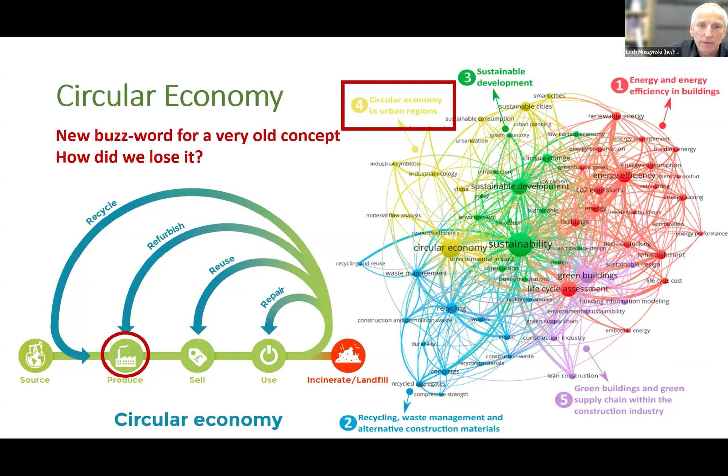We cannot reverse this, okay? But I think understanding the factors moving us away from circularity at the dawn of the industrial era should be very helpful in understanding the factors that we are now struggling against.

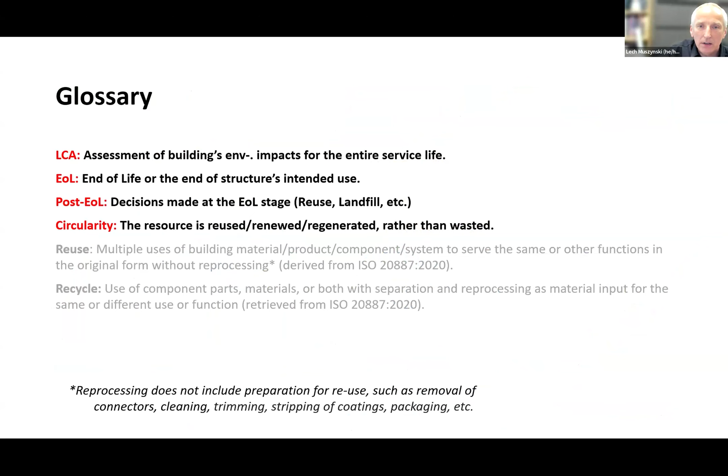The glossary of terms that I planned for here was nicely covered by Milad. I'm going to return to reuse and recycle somewhat later in the talk, so I'm leaving this for later.

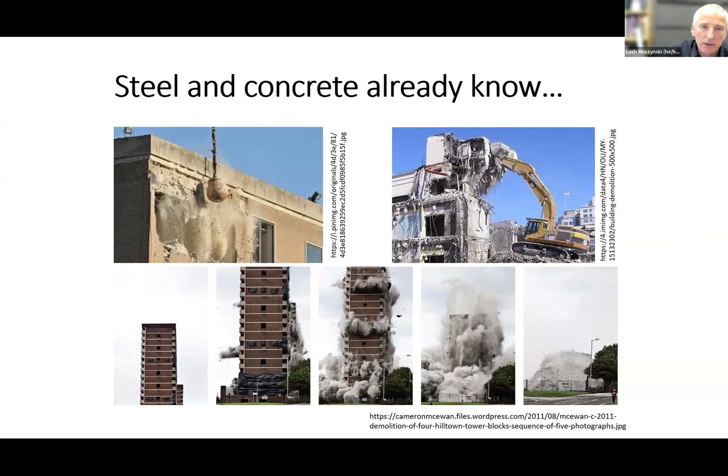Again, as we've heard, even if the world currently may not seem perfect to us, steel, concrete, and other traditional construction industries already know how to take buildings apart, and to a certain degree, even in sophisticated ways, like you see here with the deconstruction of a large building. But they also know what to do with the recovered stuff, or what actually happens with it.

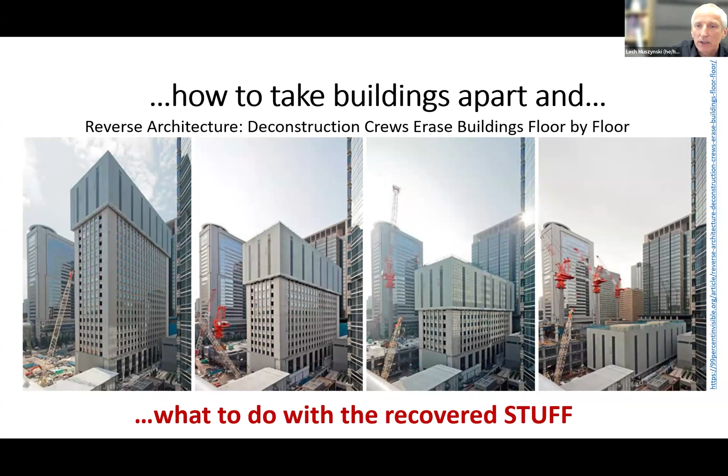Again, we may not be happy, it's not essentially a perfect process. But if we hear the best case presented by Milad in Europe, it's like 35% goes to landfill. It's still an awful number, but it means about 65% of the stuff coming out of demolition or construction is finding some kind of second use, right? So that may not be as bad as we think, and it's important not to underestimate the opponent, so to speak.

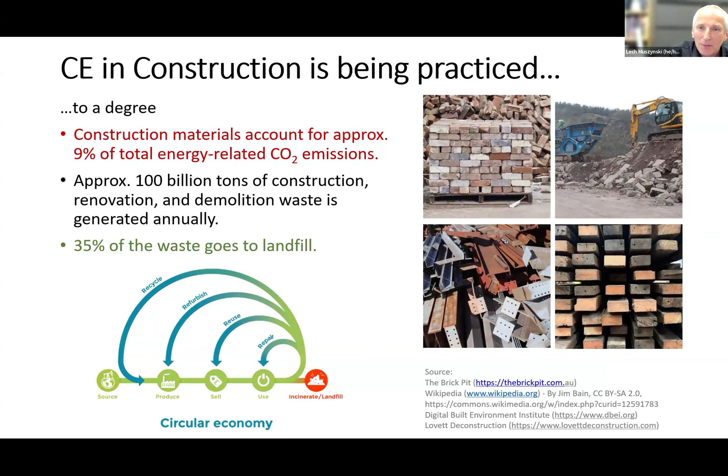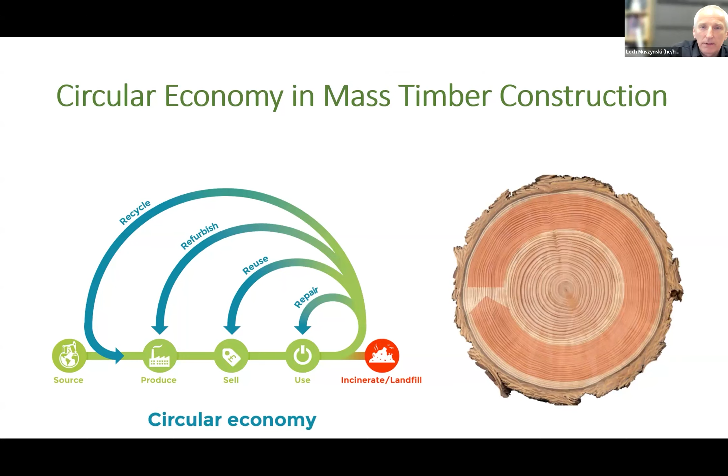Now, it goes without saying, and this going-without-saying is actually the dangerous thing here, that wood should be like the natural hero in this scenario, right? Circular economy: recycle, refurbish, reuse, repair, and at the end of this, perhaps incineration for energy.

And these mass timber buildings can be large, particularly when we're talking about panelized mass timber buildings, which is the focus of my presentation. This is one of the largest, at least for some time—nearly 4,000 cubic meters of wood in here, all prefabricated. Every little piece is made specifically for this project.

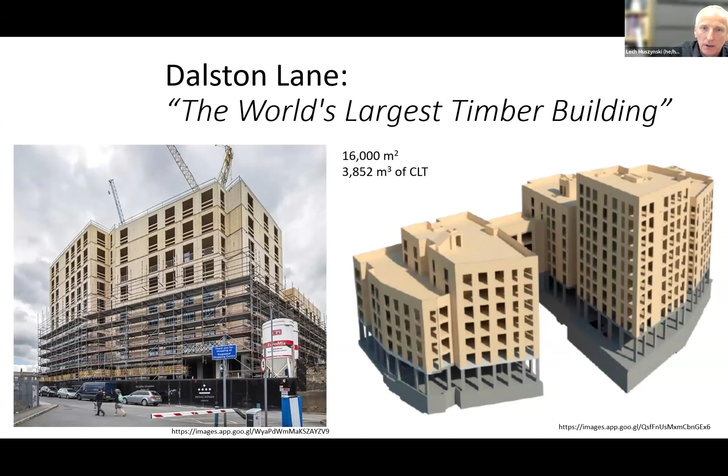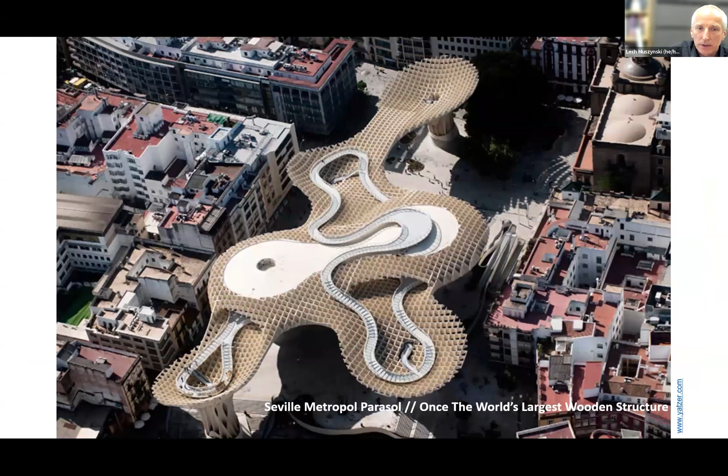And it's like a common theme: the projects must be designed before any panel is pressed or fabricated for the end use. They vary in scale, each seems to be somewhat different.

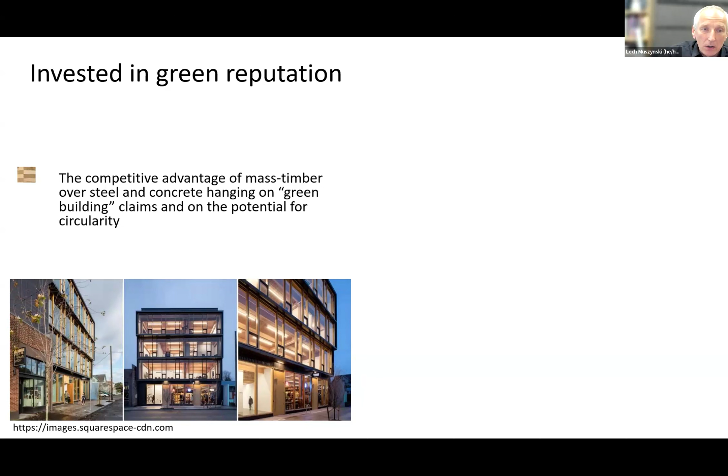Now, another important part to understand is that the competitive advantage of mass timber over steel and concrete hangs on the notion that the buildings are green and have great potential for circularity. This at times justifies going with a somewhat higher cost of building materials or construction, or just matching, not necessarily being less expensive.

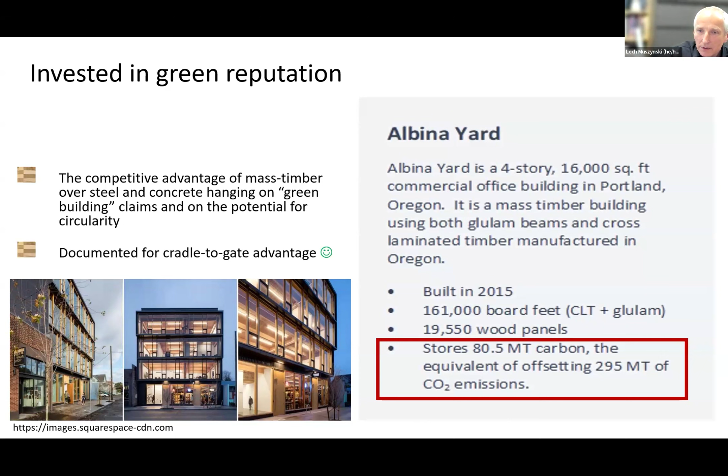Here's an example: Albina Yard, one of the first mass timber panelized buildings on the West Coast, bragging about CO2 emission benefits, with a well-documented cradle-to-gate advantage.

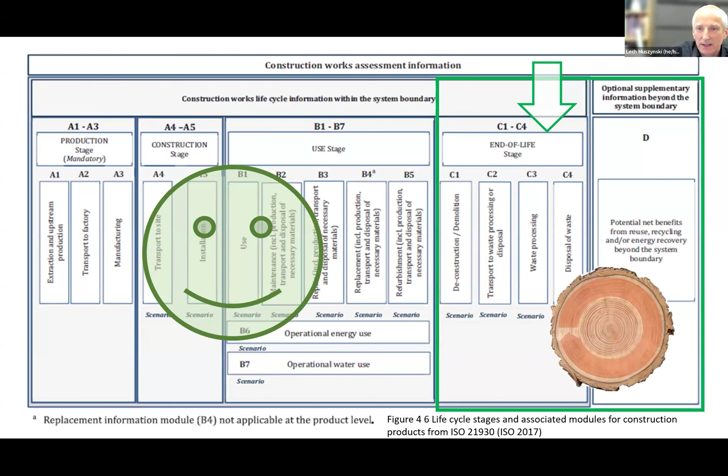Now, cradle to gate, again going back to Milad, this is this part, right? Now, end of use is somewhat more sketchy area, but we are confident—yes, wood can do that, right? Wood is circular, it comes from round logs.

So here's the moment where we need to think: okay, if we want to make good use of what comes out of a building being taken apart, we need to consider two options: reuse. And here is the tricky thing.

Quite often in our discussions, we forget to define terms before we start, and then it leads to all kinds of misunderstandings. Reuse, by ISO definition, is using building components or systems in functions that are as original or close to original, without reprocessing—where reprocessing may not include preparation for reuse, such as removal of connectors, cleaning, trimming, things that Erin was talking about.

Recycle, on the other hand, would be comminuting the original elements and using them in some other way than they were originally used.

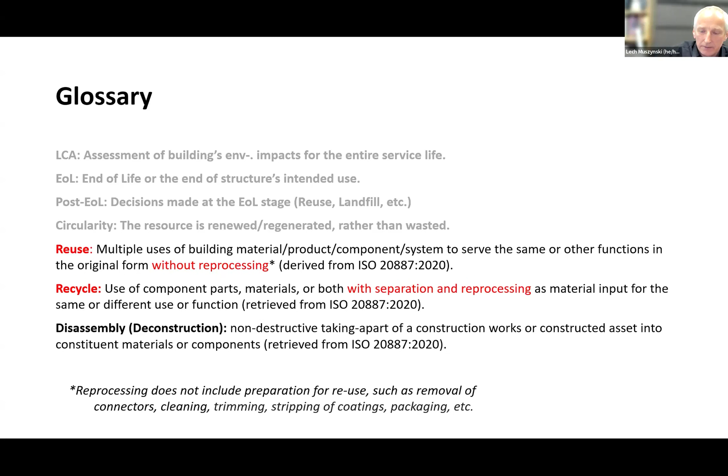Disassembly or deconstruction should be part of this. Now, quite often models that are trying to project into mass timber panels are drawing on the already proven and practiced demolition or deconstruction for light frame buildings, but this is a false similarity.

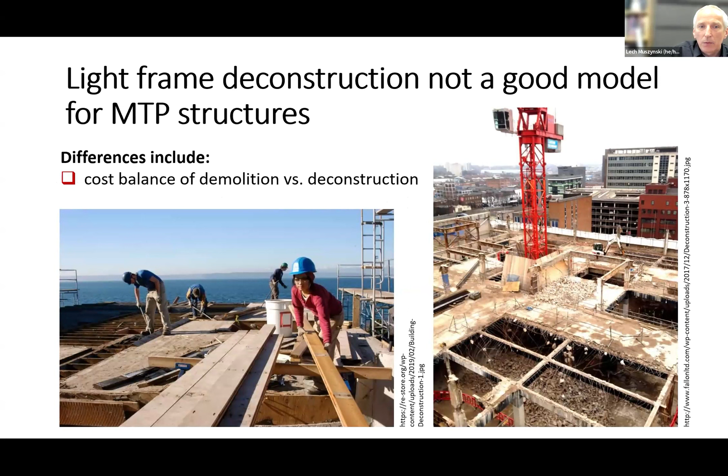There are very different cost balances for demolition versus deconstruction in light frame buildings. First, demolition is even possible, right? The other is that deconstruction can be done board by board, panel by panel, using lots of human labor. This is hardly a good proposition for large panels like this one that can weigh up to 5 tons, and they are made still in very big and heavy elements.

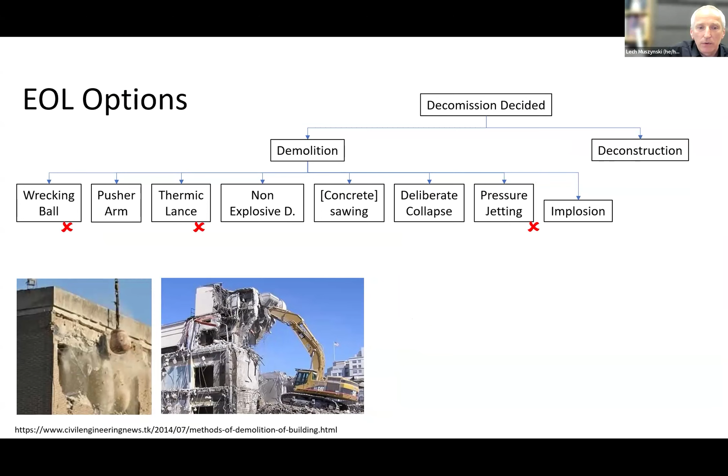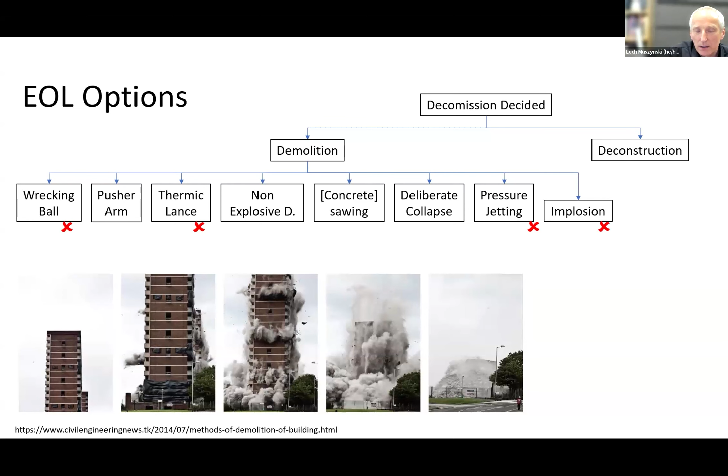So if we consider demolition options, this would be the standard suite of demolition options. We already see that some of them are just unthinkable for mass timber panel construction. These structures have very good performance at shaking tables, so they're not easily crumbled, not easily ball demolished. They cannot implode. There are certain ways that are just unthinkable for the demolition of large panels.

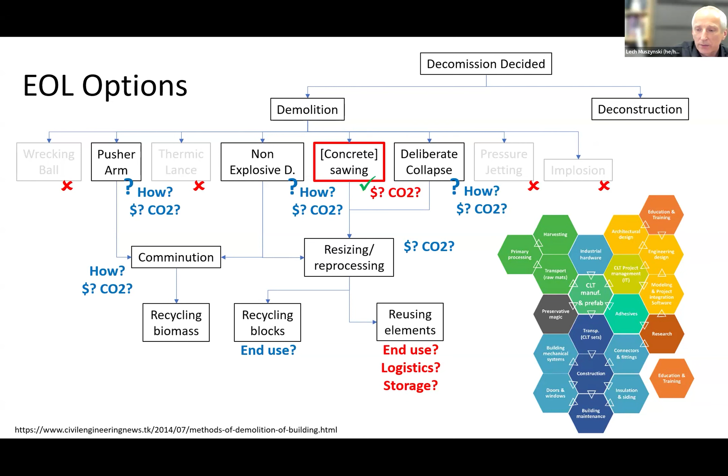Now, even if there are some that assume that parts can be just cut out during the demolition process, they end up with resized elements that are very difficult to reinsert in the process of building or construction that assumes customized fabrication of elements for the end project.

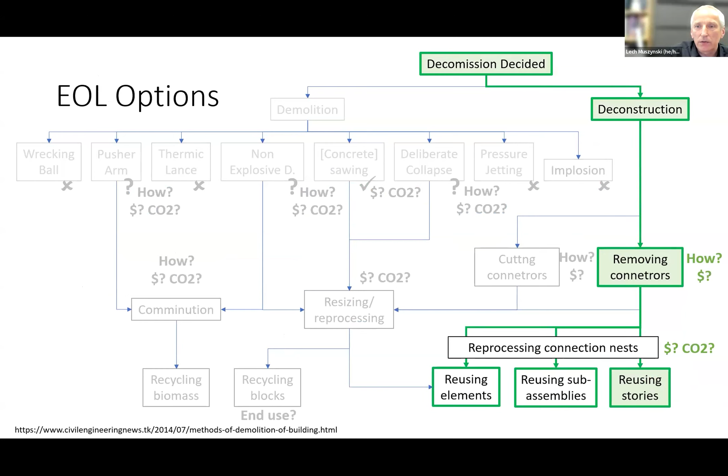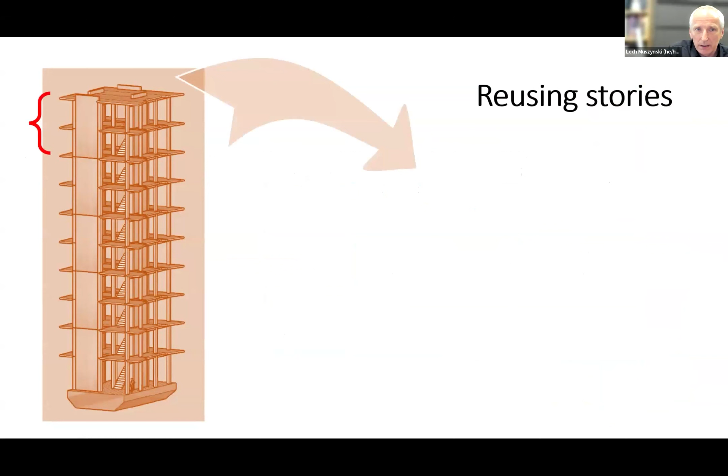So the logical path should be the deconstruction approach, where you are just removing or cutting through connections and reusing either elements, sub-assemblies, or stories. When I'm thinking about reusing stories, it would be if you have a 10-story building and you take it apart, you may reuse the same elements in the same configuration. This would not require any refabrication in a series of smaller buildings.

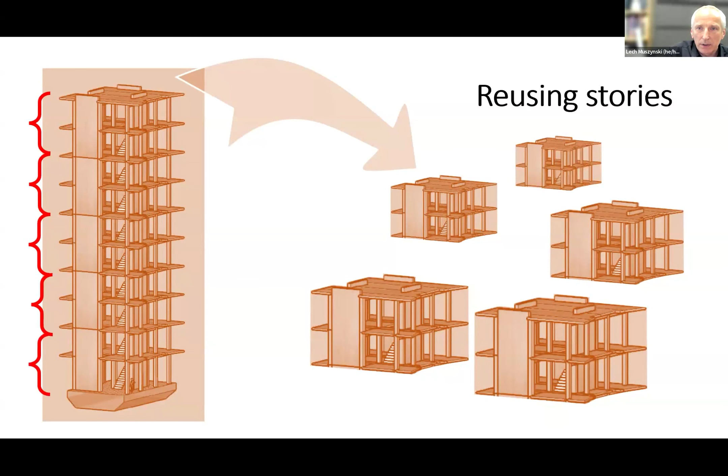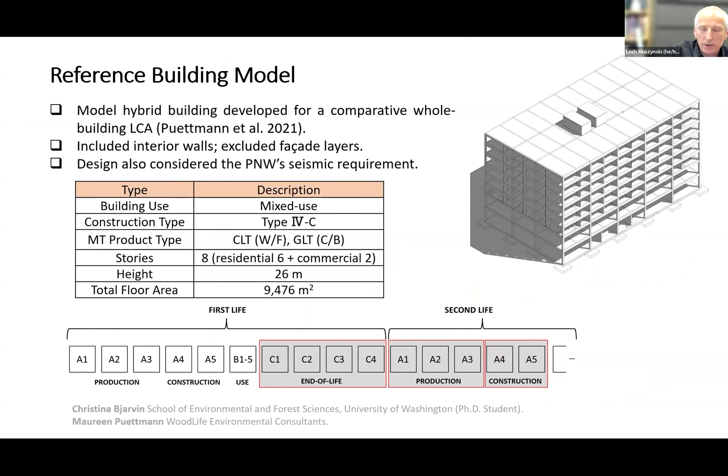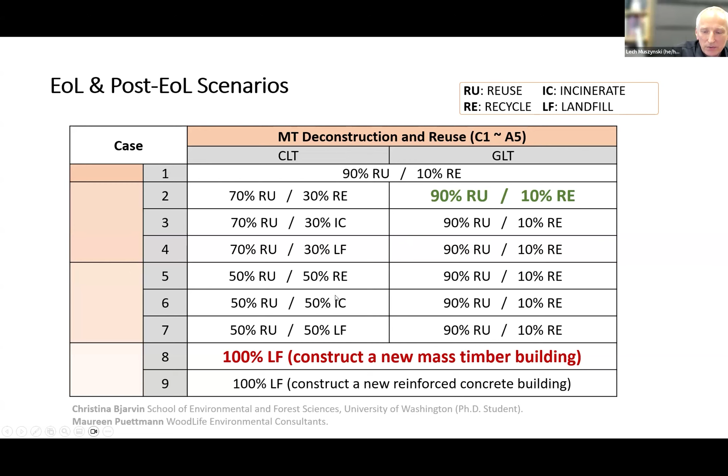And we checked just that. This is a little LCA exercise that has been done by Christina and Maureen on a building with certain assumptions, focusing mostly on the first life and the end of the first life and the beginning of the second life of a building. Nine different scenarios have been tried for CLT and glulam, and we've just selected two extremes for this presentation, just to see how it works.

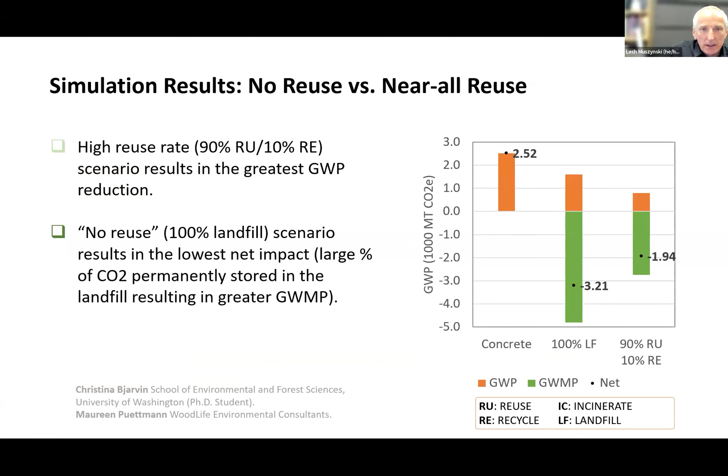And why the high reuse rate, like 90% elements reused and the building rebuilt, essentially the same building on the same place - so there's no transportation or logistics involved here - loses, hands down, with landfilling the entire thing.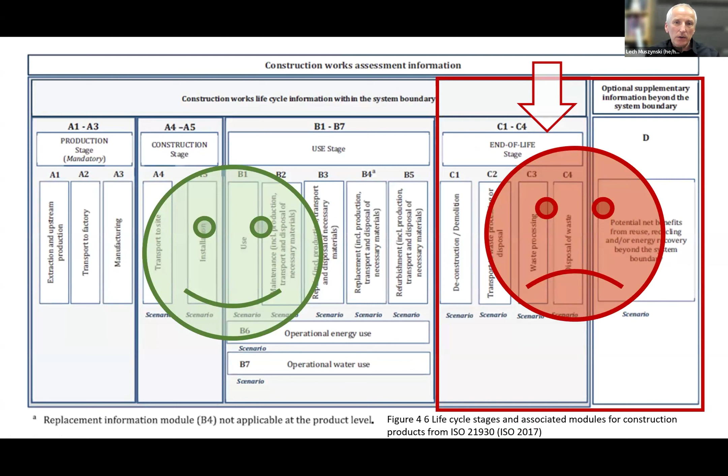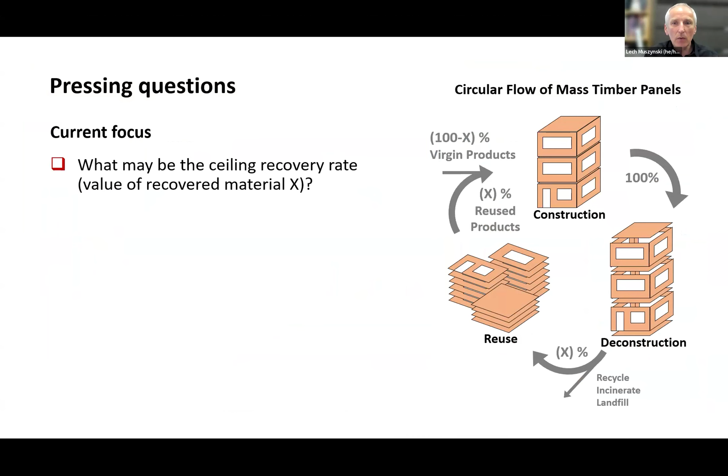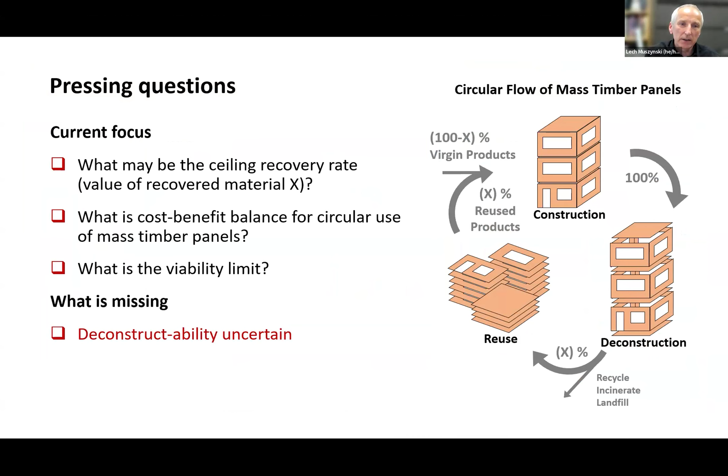And that's troubling, right? I mean, we feel in our hearts and minds that this cannot be true, but we cannot dismiss it without evidence, and the evidence is actually hard to come by. This is because even as our current focus is on how much can be recovered, what is the value of the recovery, what is the cost-benefit balance of this, we are still missing information on deconstructibility of this large panelized building and any empirical data to verify viability of circular scenarios.

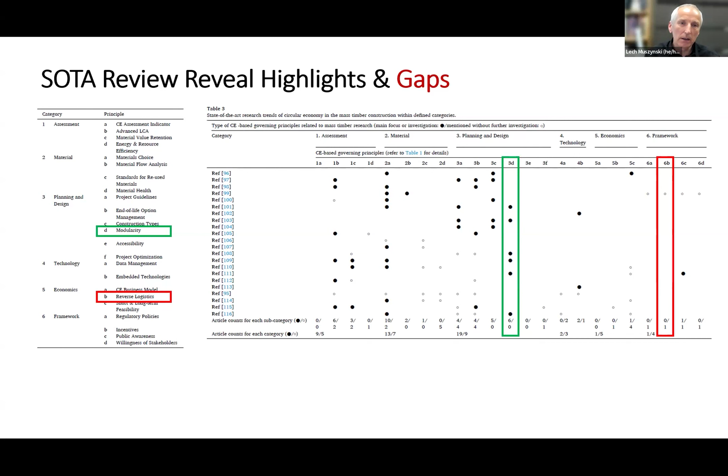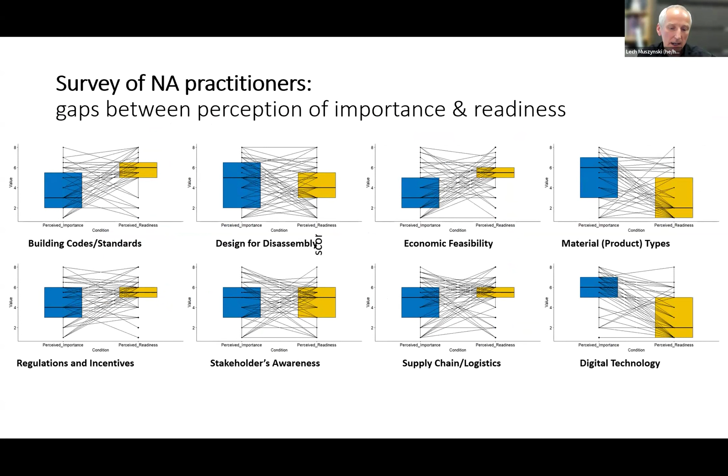These are missing. And the large literature review that Namiuk has performed revealed as many highlights as gaps - literally holes in the information that would be needed to fill this. Another survey, part of Namiuk's dissertation, shows gaps between the perception of importance and readiness. Namiuk is still working on analyzing these disconnects between the perception expressed by professionals and what we found in the state of the art.

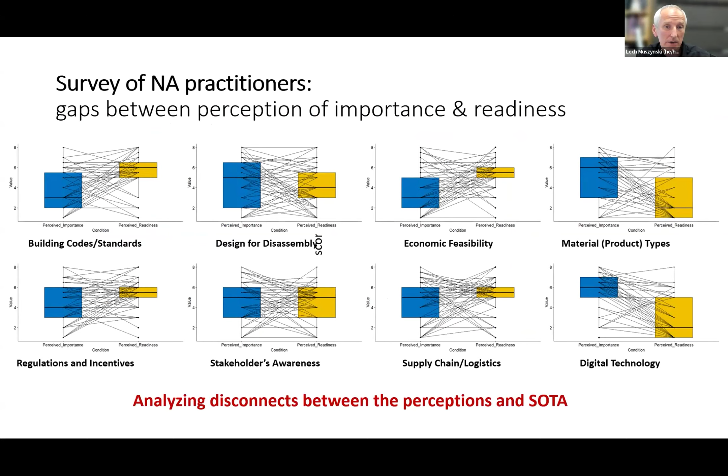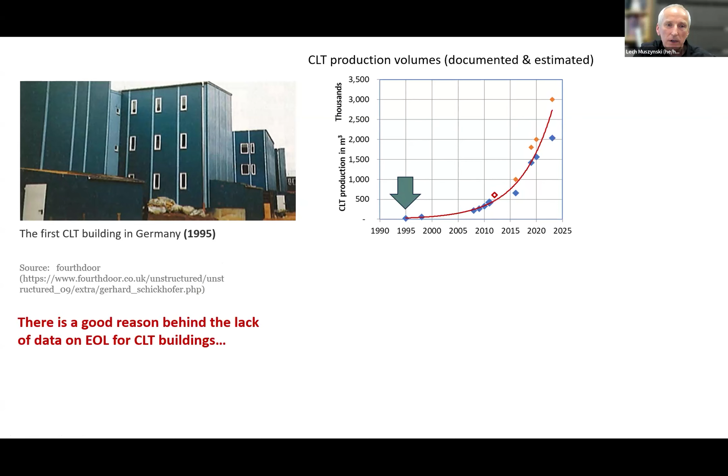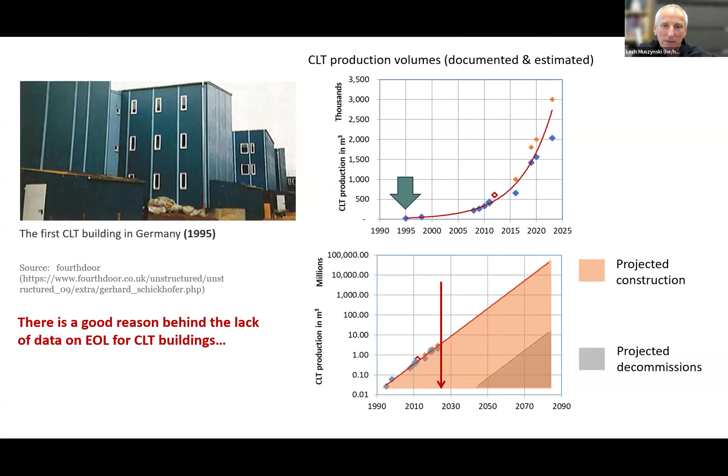This is our data. This is where we are. If we project it to the future, actually the first deconstructions are going to happen like 50 years since this first building occurred, so this is way in the future. Few buildings mark even the halfway point of their service life.

And then again, if you think of the differences and why the light frame is not a good model for this - even as the data exists - it's much easier to think of reusing a 2x4 as another 2x4 in some other building, or a window in some other building, or a brick as a brick in some other building.

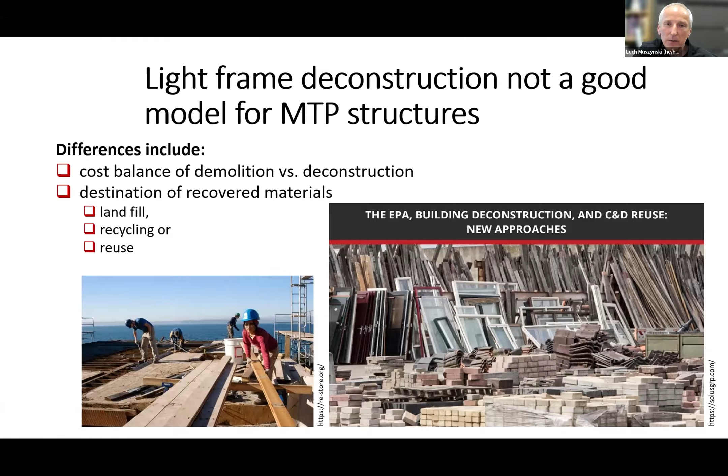It's much more difficult to think of an element like this that is specifically cut and made for a specific element in a building to be used in another building that may have a different shape and call for different stuff. How are we going to approach it? Should we wait another 20 years until the first buildings are being demolished?

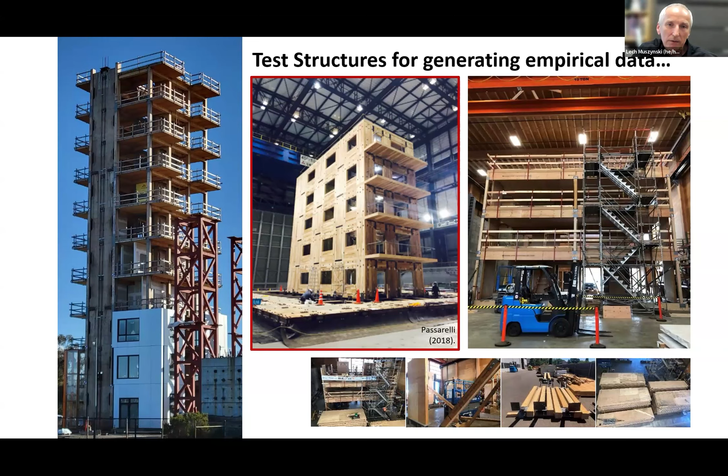We think not. In the meantime, we have short life cycle structures, panelized structures that are put together just for testing and quickly after that removed. That means essentially deconstructed, not demolished, orderly put apart. From this we can learn many things, as Namiuk is doing right now.

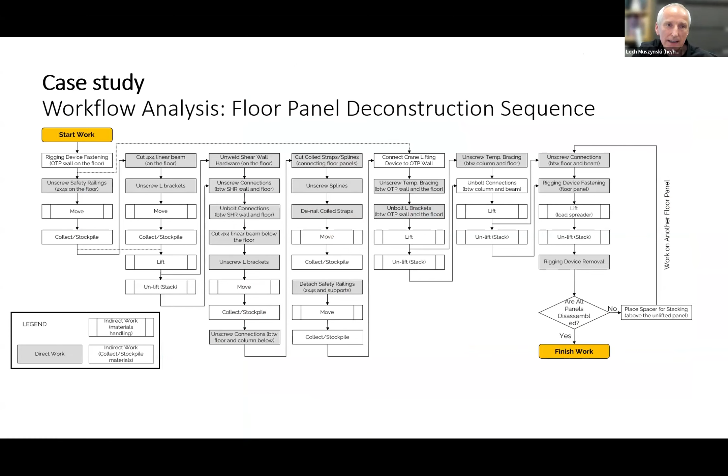Workflow analysis can be determined on real cases, or the evaluation of reusability of recovered elements, element by element. That takes into account all kinds of changes made between the original design and actual construction, and all kinds of damage that may happen during service, which for test buildings is quite intense. They are being subjected to abuse.

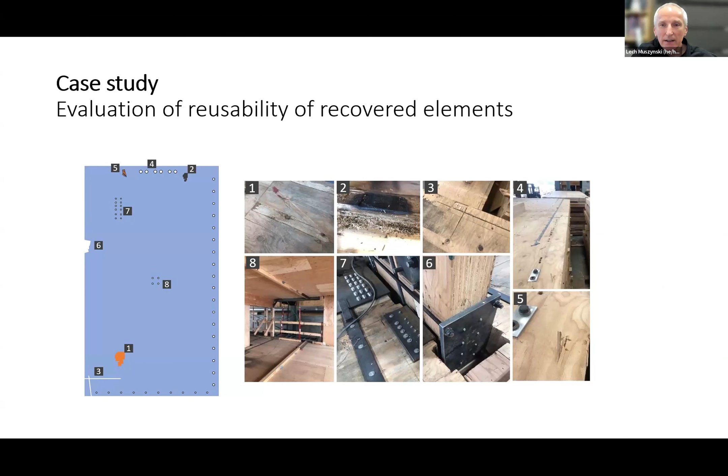And then the deconstruction. So the next thing I touched on is where are you going to use this precast thing? We are thinking, well, again, in buildings. But in order to be able to reuse them in these other buildings, the buildings have to be somehow connected. They need to be similar. You cannot use the rectangular elements from one rectangular building into triangular elements in a triangular building.

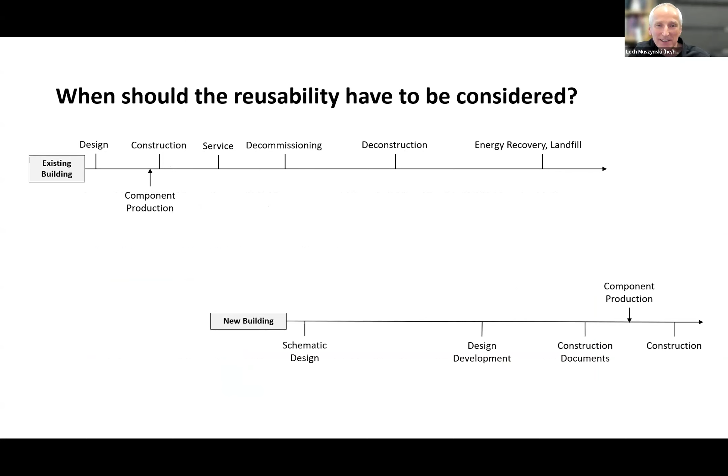This would require processing—it would not be reusing any longer. So it makes all sense not only to evaluate the reusability at the time of deconstruction, but actually evaluate it as soon as decommissioning happens, or even better, at the design of the first building, where the deconstructibility and the end use in the new building is already conceptualized at some level.

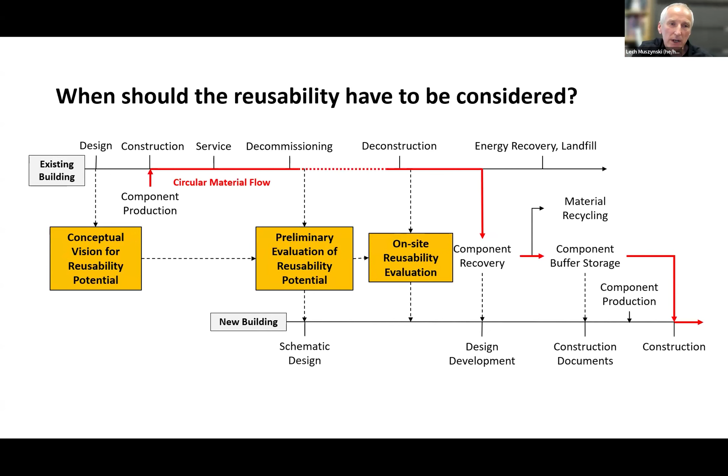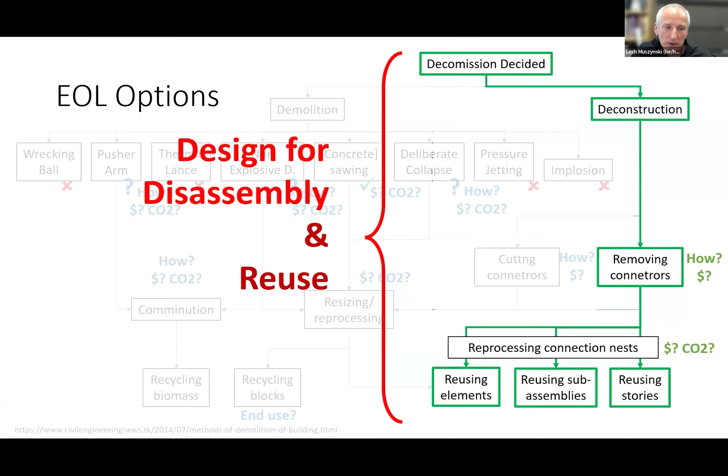It is hard to predict what's going to happen 50 years from now, yet we must. So this thinking has to be infused into the end-of-life scenarios at the time the first building is being designed. But there are more hurdles ahead.

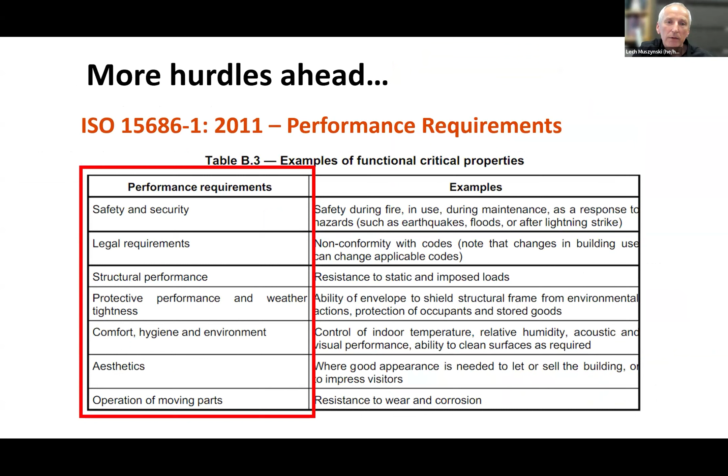If you think about it, whatever you recover from the first building will have to go through the same scrutiny as new materials before you put it into a new building. And this is beyond just aesthetic and hygiene—it's actually the legal requirements, structural performance, and so on. Somebody is going to have to put a stamp on this material or elements recovered and guarantee that they are going to perform.

So here is a little summary. While there is a great potential for circularity in mass timber buildings, there is also a set of non-trivial challenges. I'm not saying barriers—challenges to be overcome through research that is ongoing as we speak here at Oregon State University and elsewhere. So first, the size and weight of individual panels just limit the options for demolition.

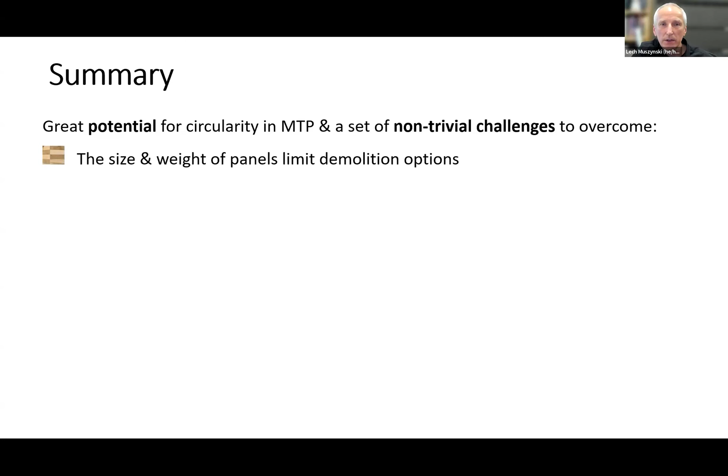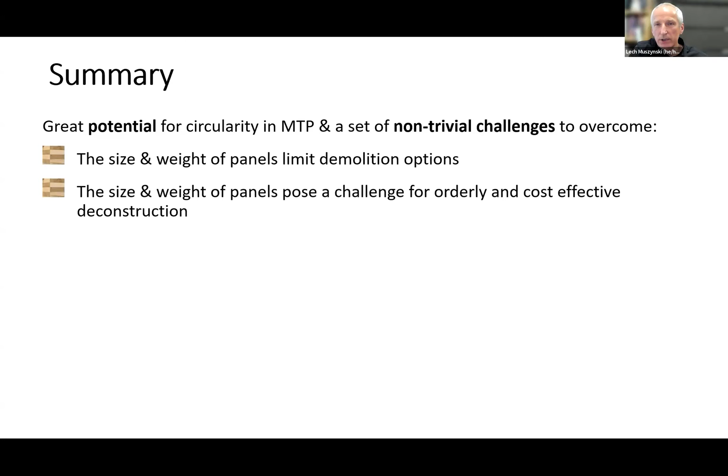We cannot see right now what would be a good demolition strategy for this kind of building, even if you selected to do so. The size and weight of the panels pose also challenges for orderly and cost-effective deconstruction. These are heavy elements and have to be dealt with somehow. It cannot be recovered by hand with a hammer.

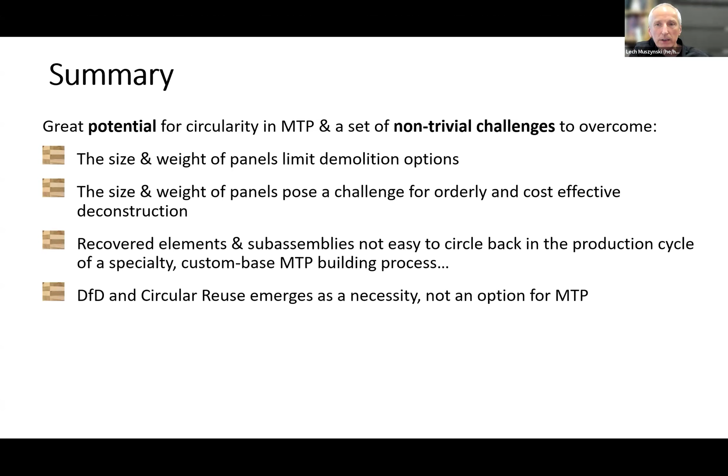Recovered elements and sub-assemblies are not easily circled back into the production cycle of a specialty custom-made mass timber panel building process, where everything is manufactured to specific design. Then the design for deconstruction, and we need to add circular reuse, emerges as a necessity, not an option, when it comes to mass timber panels. New approaches have to be forged before mass timber panel structures reach retirement age in numbers.

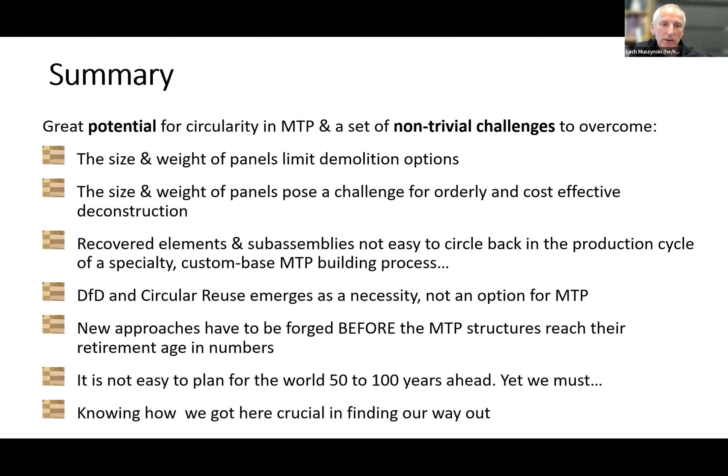Right now this seems like no problem because nobody is dealing with this problem currently, but it's going to come about at the same exponential rate that we are building them right now. It is not easy to plan for the world 50 to 100 years ahead, yet we must. And knowing how we got here is crucial for finding our way out.

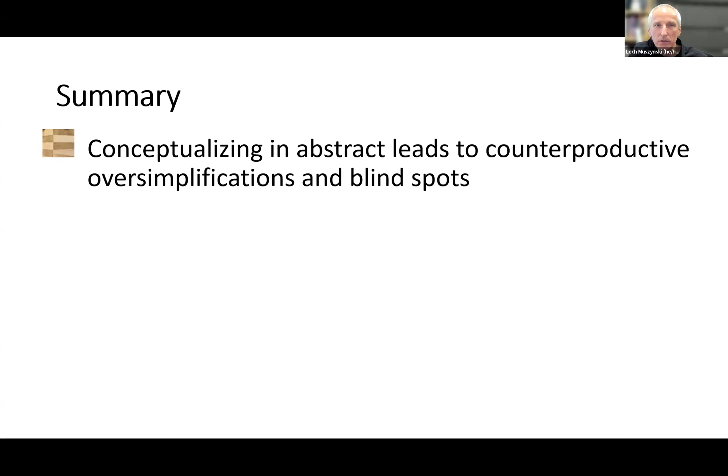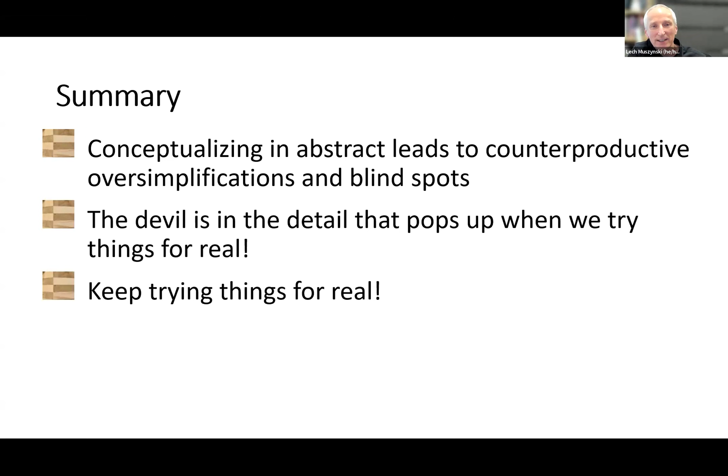And we should say that conceptualizing in abstract—we've just demonstrated it—conceptualizing in abstract, in absence of data, quite often leads to counterproductive oversimplification and blind spots. The devil seems to be in the detail that pops up when we try doing things for real. And we need to try doing things for real in order to find out how things are going to go. So we need to go beyond speaking circularity and assuming things, to practical garnering of empirical knowledge. And that would be all of my spiel.